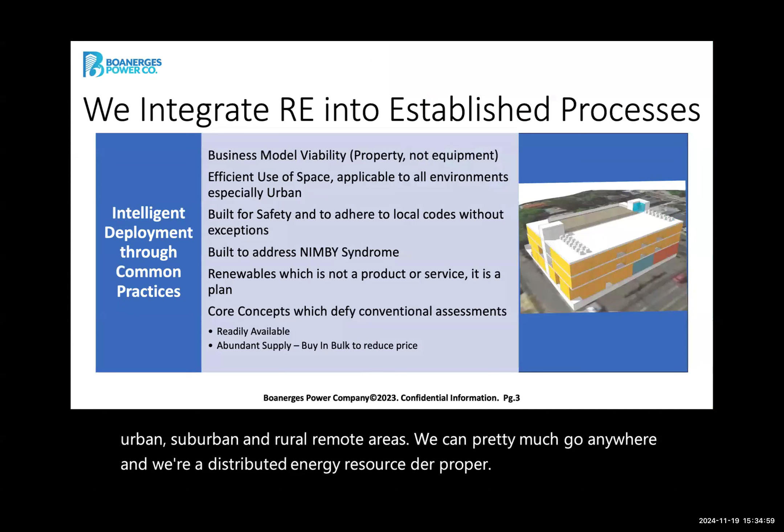Let me see something, see if I can change my setting here. Can you guys still see my screen without my notes? Well, we see right now, Terrence, a very small version of the presentation, another one off to the right, and then your slides across the bottom. Okay, I can't do that then. All right, I'll just have to wing it. Let's see if I can do it again.

What we do is integrate into established processes. We found that when we first started, we were always looking at some sort of exception or variance, especially for height. As I did my research, I found that one of the best ways to build a business is to build it so that it already follows the rules instead of attempting to make new rules for myself or get exceptions.

We use space efficiently. We can be applied to all environments. We are built for safety.

We adhere to local codes, especially gas codes or spatial codes between electrical equipment and water. We're built to address the NIMBY syndrome, not in my backyard, because we've seen several projects go awry and get canceled because of not in my backyard syndrome. It became a big problem early on.

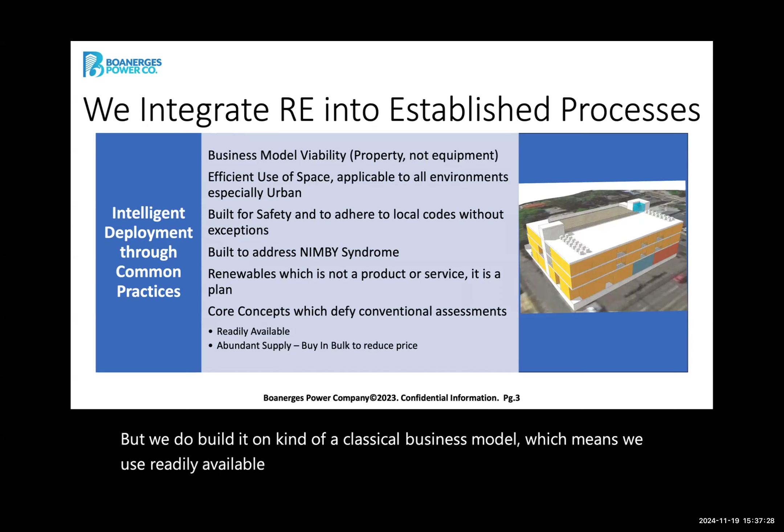So our core concepts kind of defy conventional assessments, but we do build it on a classical business model, which means we use readily available resources and they have to be abundant in supply so that we can get them cheaply. So those are our foundations.

We try to raise the standard of renewable energy and try to erase the stigma that it's only for the daytime and you can't use it at night. So we were already into applying multiple sources of renewable together.

We found that most people were like, can you do solar? Yes. Or can you do wind? Yes. And now finally they're saying, let's do a combination of solar plus wind. Well, years ago, we were already doing combinations of solar plus wind, plus battery, plus natural gas.

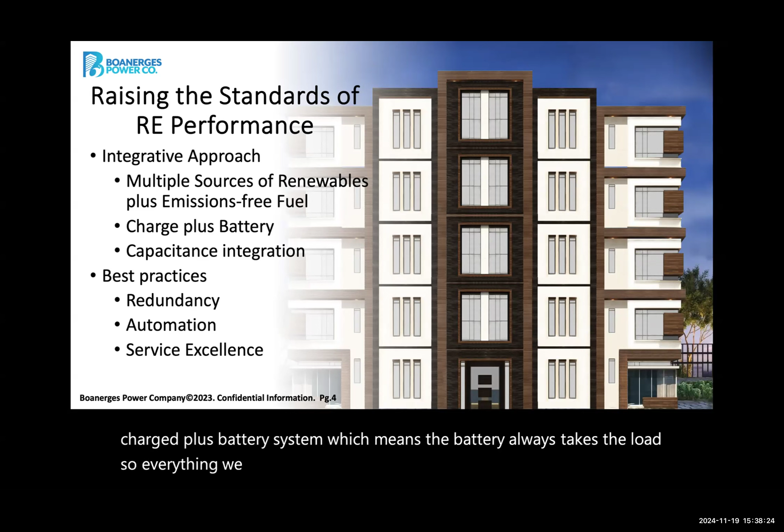We're always plussing, as well as we're a charge plus battery system, which means the battery always takes the load. So everything we do, the battery's doing the work, not the solar or the wind or any kind of input. And that's our first efficiency.

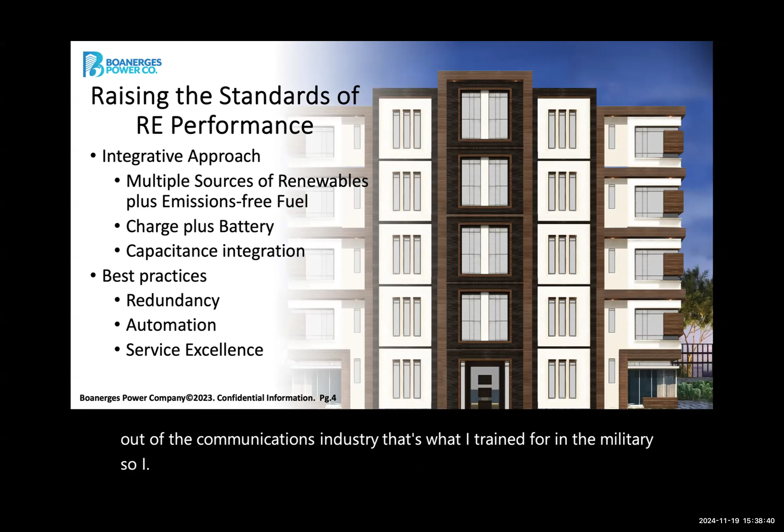I came out of the communications industry. That's what I trained for in the military. I spent about 30 years in satellite, fiber, and television automation. So I'm very familiar with user interfaces, building automation, and building machine control systems. That's what I did for 30 years, and I kept doing that through these processes.

The pictures you're going to see are just indications of what we're about to do. They're just setups, they don't apply to the information I'm going to give you here.

So we build a multi-powered load balancer. It's a platform, a structure, a building, which incorporates solar, wind, hydrogen, hydro, and batteries. It's a pump storage system, modified small pump storage systems.

It works 24 hours a day, 7 days a week. We've worked it with both propane or natural gas, and also we can work it with hydrogen fuel cell setups. We try to fit in where we can fit in, especially in our earlier days, and that was mostly propane for remote uses way out in the middle of nowhere.

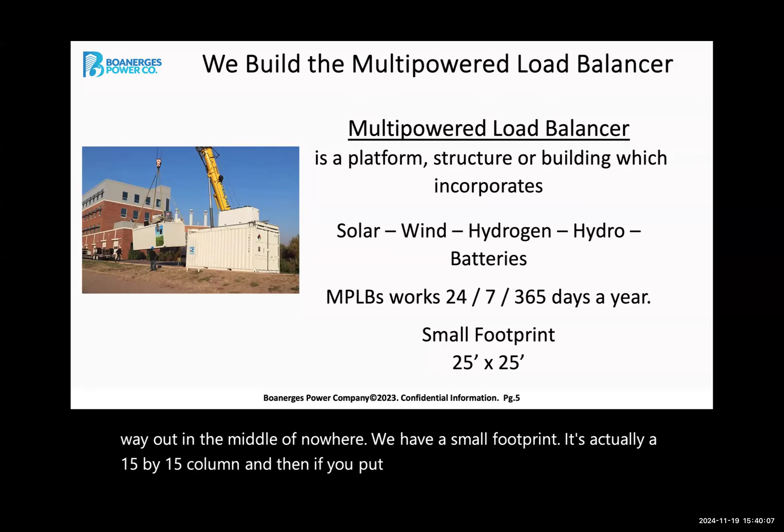We have a small footprint. It's actually a 15 by 15 column. And then if you put it inside its own building, it's a 25 feet by 25 feet column finished construction.

Our basic principle is when the sun shines, we charge the pump battery. When the wind blows, we charge the pump battery. And when the sun doesn't shine and wind doesn't blow, we use fuel to charge the pump battery, for 24 hours of operations. And if we're using hydrogen, it's 100% emissions free.

Right now, our big project that we're pushing for, and the reason why we were at Hydrogen Day, is that we've developed a green hydrogen of sorts, or a hydrogen fuel station that is a distributed hydrogen production. So instead of a central production where it's a hub and spoke, we developed something different.

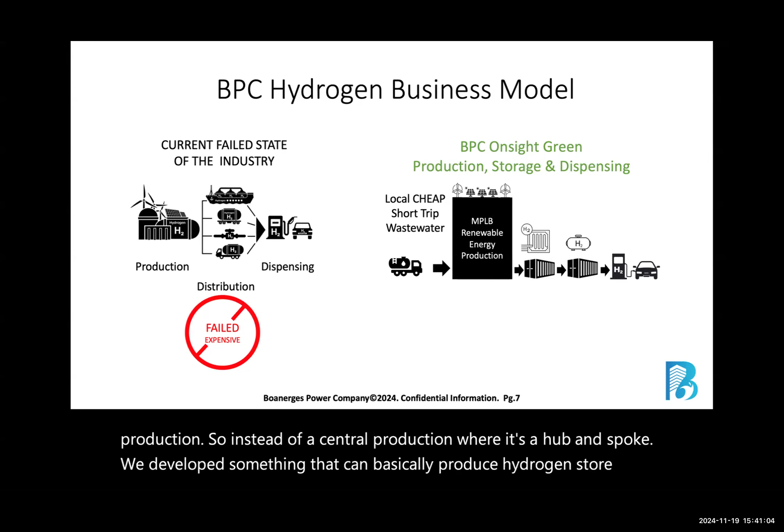It can basically produce hydrogen, store it, and dispense it all in one spot. Our input is, of course, natural gas or hydrogen, and also wastewater. So we built it on wastewater.

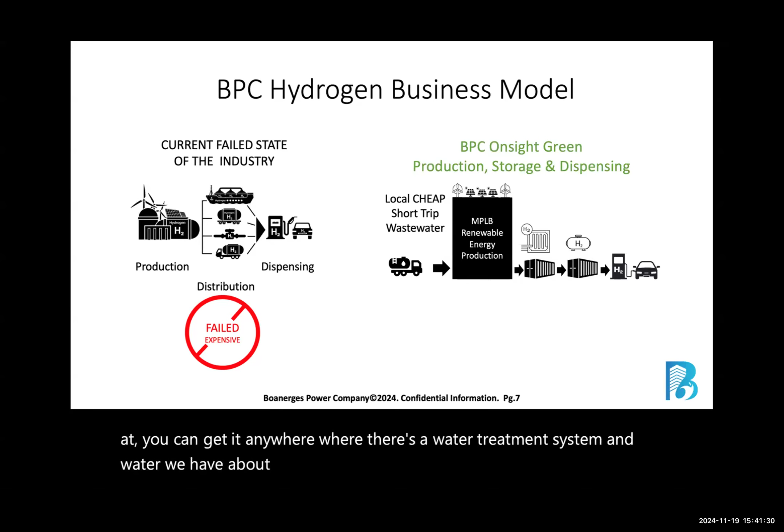Wastewater in the United States is extremely available. You can get it anywhere where there's a water treatment system. And we have about 16,500 water treatment systems across the United States of America.

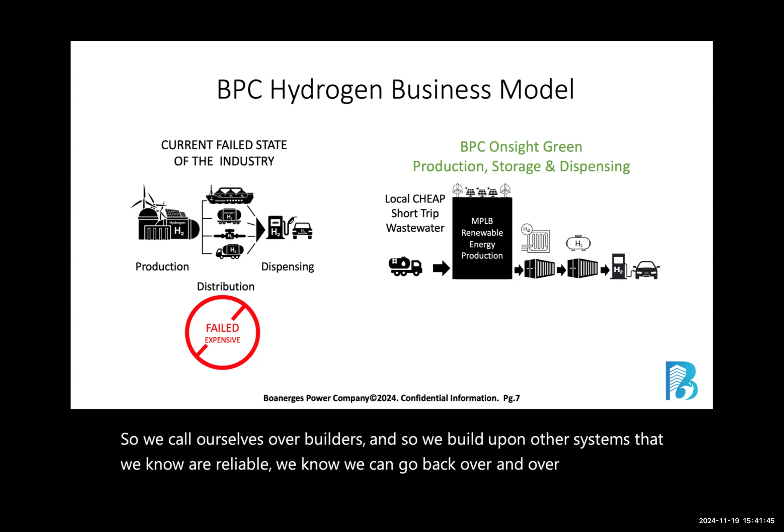So we call ourselves overbuilders, and we build upon other systems that we know are reliable. We know we can go back over and over again, systems that are extremely cheap, and that will not fail us easily.

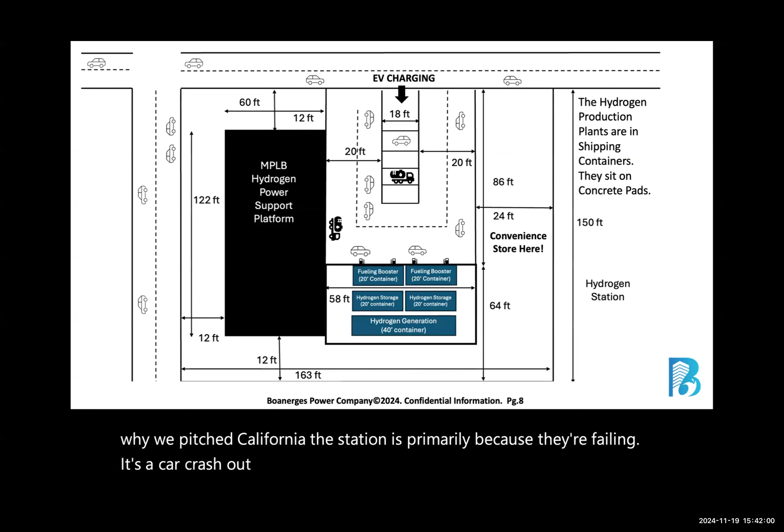And the reason why we pitched California, the station, is primarily because they're failing. It's a car crash out there. The oil and gas companies are really failing to serve fuel cell electric vehicles across the state.

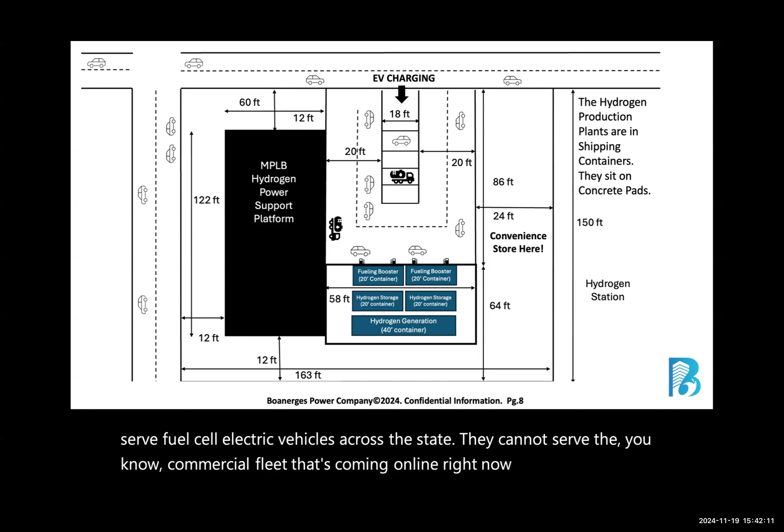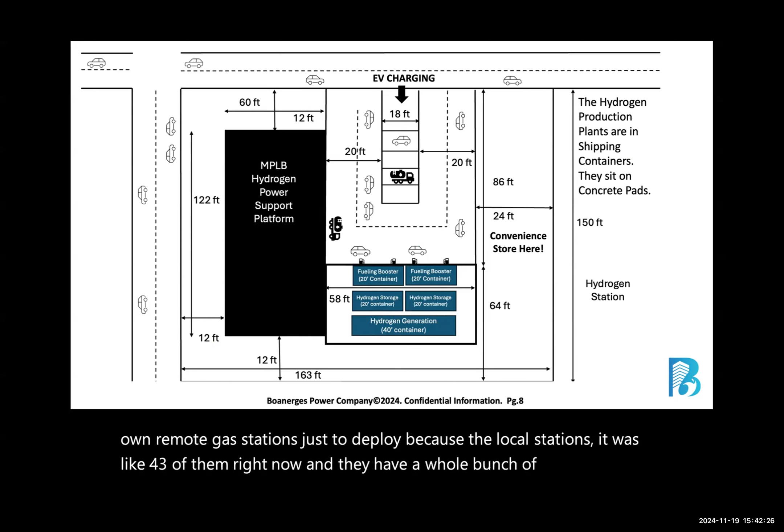They cannot serve the commercial fleet that's coming online right now. So even the commercial fleet is having to develop their own remote gas stations just to deploy, because the local stations—there's like 43 of them right now, and a whole bunch are in operation, or basically in planning or construction. They're just not doing the job. They run out of gas a lot.

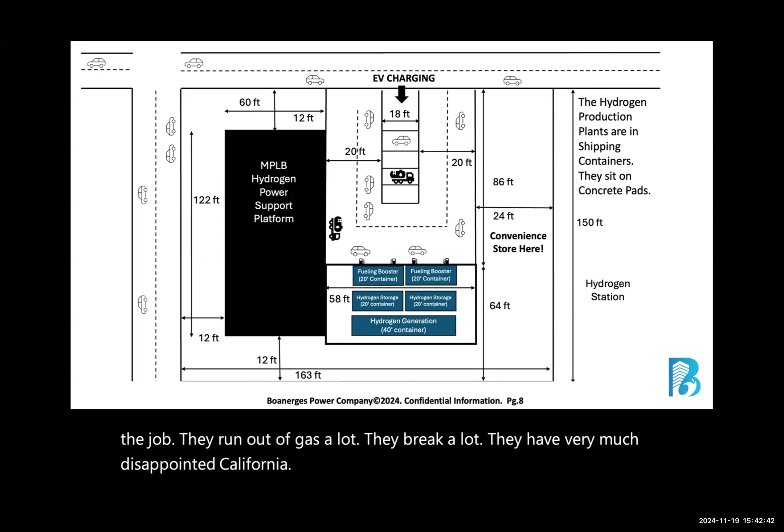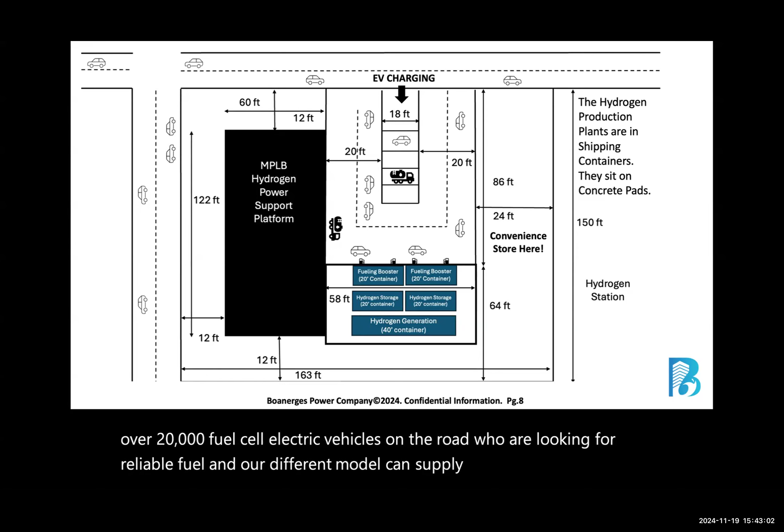They break a lot. They have very much disappointed California fuel cell electric vehicle owners. So we figure it's an opportunity for us to come in and stake a claim in that market, and actually have a market of over 20,000 fuel cell electric vehicles on the road who are looking for reliable fuel. Our different model can supply that reliable fuel through redundancy and excellent service.

So just to give you an idea of what we've done in the past, who we are, and how we do things, I'm going to show you some of our various quotes for some of the people we've attempted to work with. RTD had some land at I-25 and 225.

It used to be land that they were going to put a train line in to Aurora down that line, and they decided not to, and started to sell it off about 3 or 4 years ago. So we pitched them a development for disabled people, right across the freeway, right down the street from the RTD station, with very flat plains where they could easily roll down.

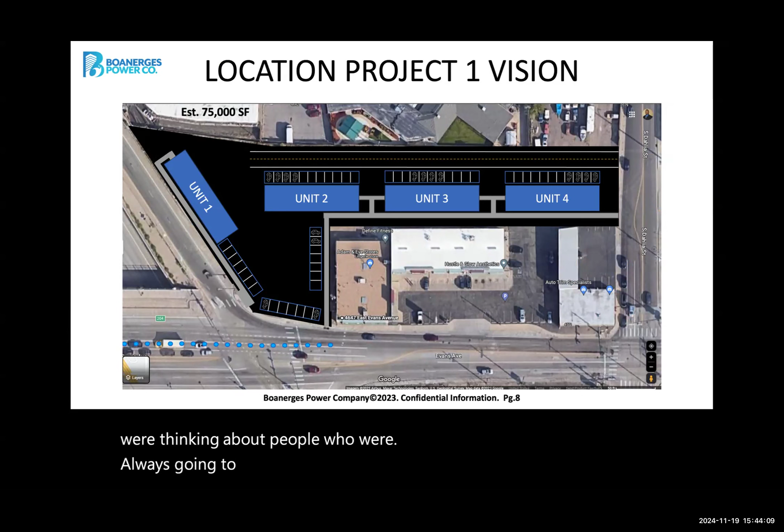So we were thinking about people who were always going to be taking RTD or some sort of public transportation instead of driving themselves, having a place where they can have families and easy access to an RTD station. An RTD station is to your left and across the freeway.

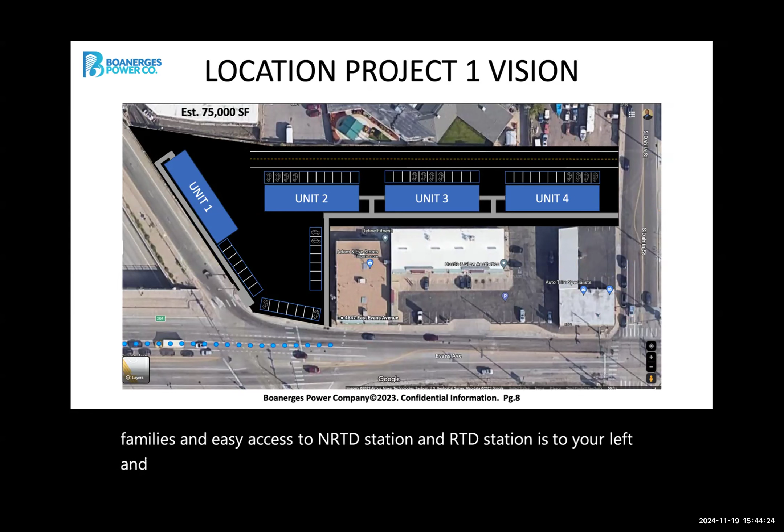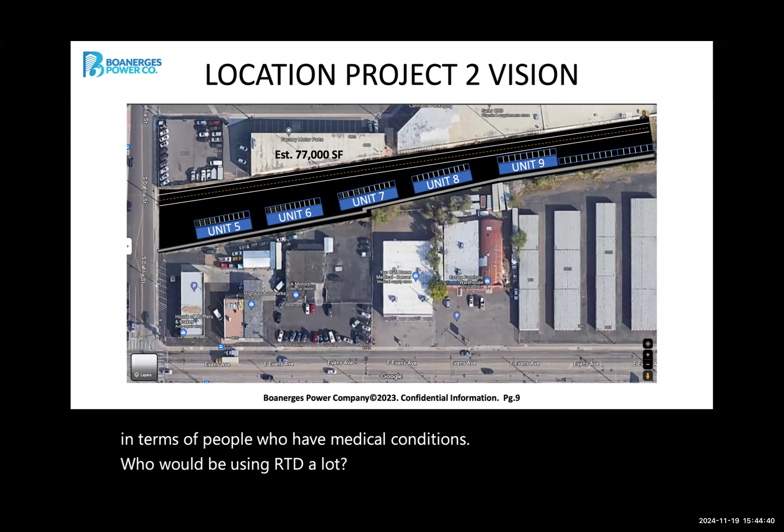So we were going to put some homes there, and these platforms are backup power for these homes. We're thinking in terms of people who have medical conditions, who would be using RTD a lot, and they would need housing that catered to that. So that was one of the ideas we pitched about a year and a half ago.

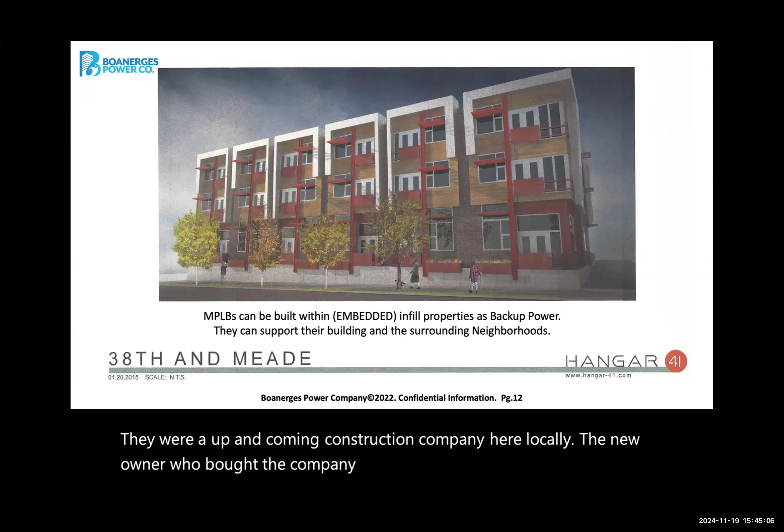38th and Meade takes us back a little further, to '22. We had a partnership with our friends at Compass Construction. They were an up-and-coming construction company here locally. The new owner who bought the company really loved green buildings, and he was trying to do a green multifamily project up off of 38th and Meade.

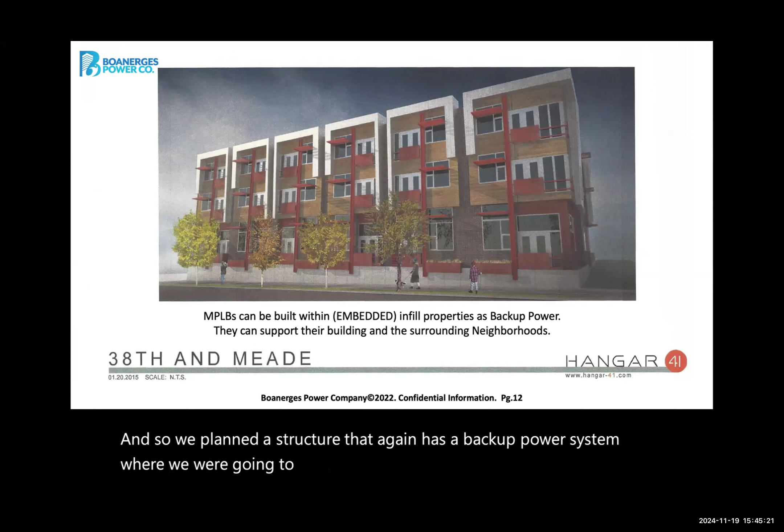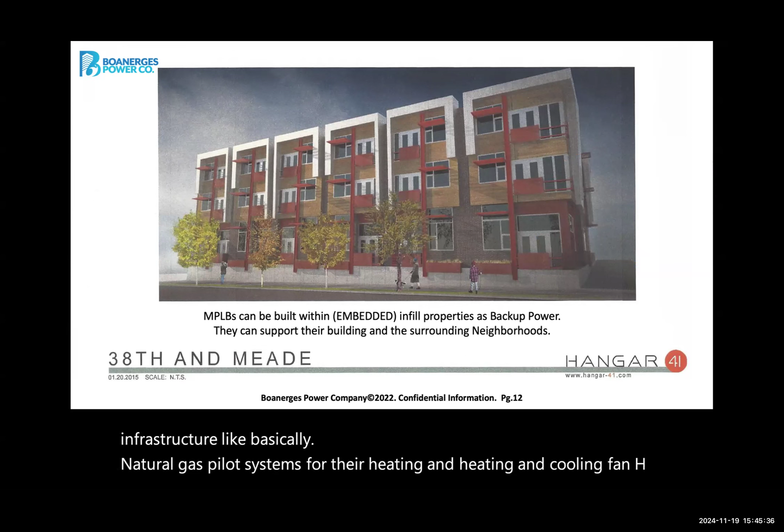So we planned a structure that again has a backup power system, where we were going to support what we call critical family infrastructure—basically natural gas pilot systems for their heating and cooling, HVAC fan, and things like that. That stuff would stay on, and they'd have what's called green plugs—one or two plugs in each household—that would stay on during power outages.

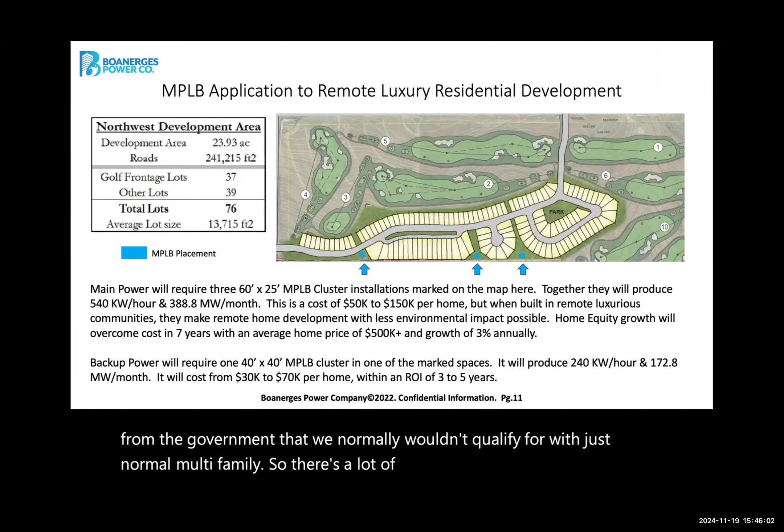So we use renewable energy as a way to garner resources from the government that we normally wouldn't qualify for with just a normal multifamily project. There's a lot of resources with all the different bills that have come out—IRA 2022 and others—where renewable energy can really help you build, getting a 20-30% return for projects. So that's what the idea was: add renewable energy to a housing project and help with the funding of it.

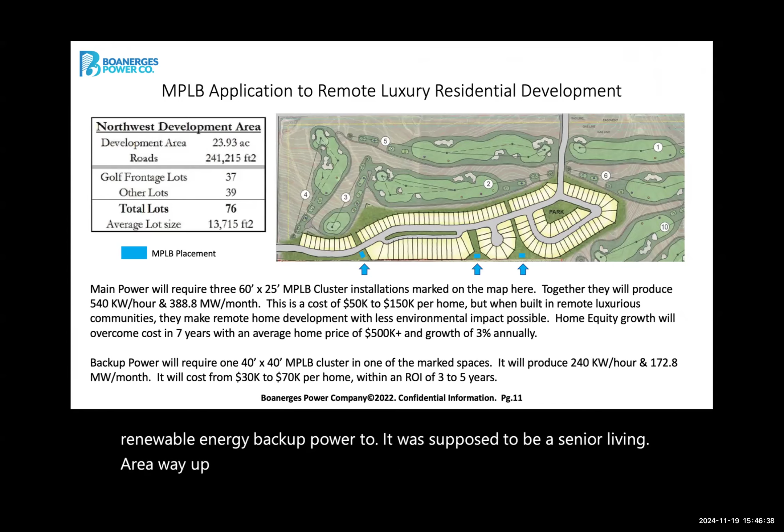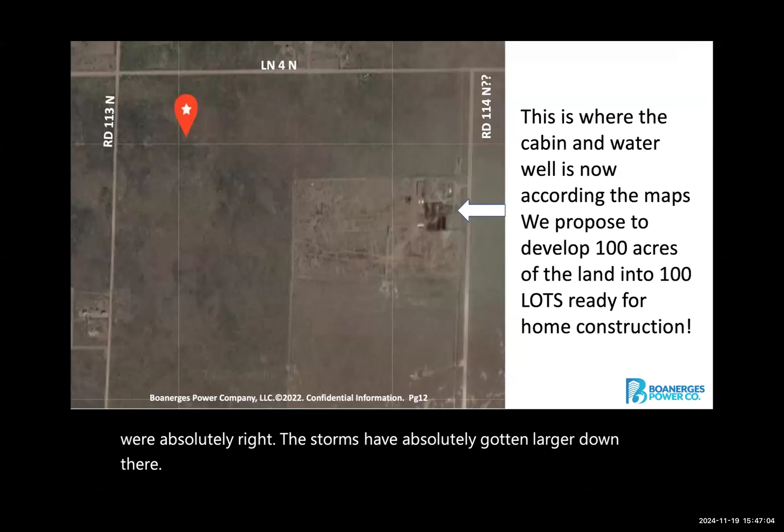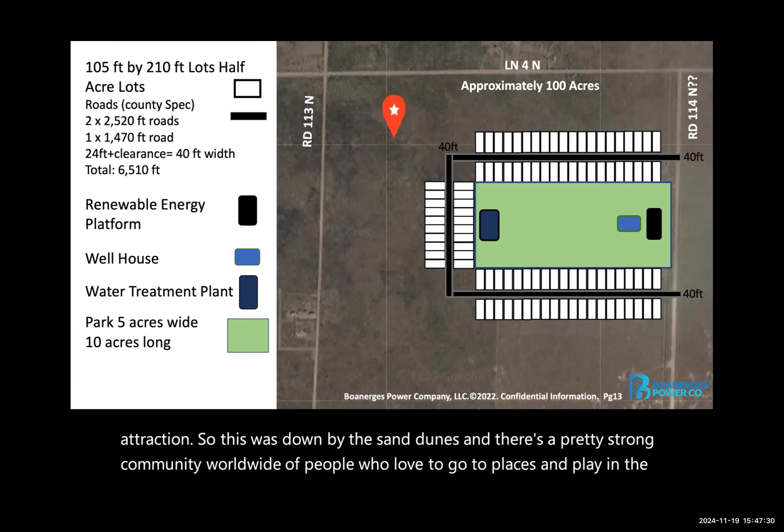Alamosa is a green lots project—one of our touchstones where we put a green lot out for sale near a place of attraction. This was down by the sand dunes, and there's a pretty strong worldwide community of people who love to go to places and play in the sand—dune buggies, races, dirt biking, a huge community. And Alamosa, if you've never been to the area, is surrounded by mountains, so it's beautiful.

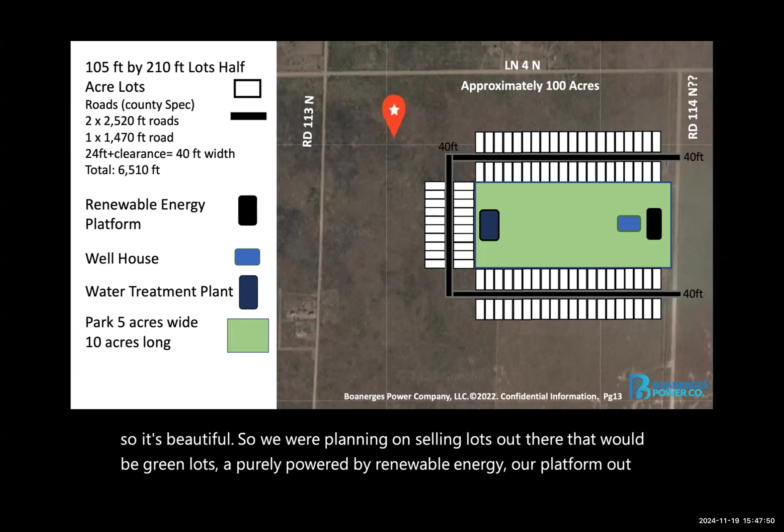So we were planning on selling lots out there that would be green lots, purely powered by renewable energy, wired to the different lots so they could build on the lot, or use it as a camper, an annual thing, a drop, a small home or trailer. It'd be completely powered by our platforms.

So that's kind of who we are. We attempt to put renewable energy to work in places where people normally believe it cannot work because of space, cost, and all these different things. And we build business models to make them work.

Our return on investment for our hydrogen station is 5 to 7 years. And if we were able to really get that big payout - I'm not sure if it's likely anymore with Trump elected, but it's still possible he might continue those programs - we'd be able to get something like $4 million back on a $15 million project using the IRA 2022. I can show you the different programs they're talking about. It's quite a bit of money, and it makes various projects where we're using expensive renewable energy viable because we can maintain it over the long term.

That's Boanerges Power Company.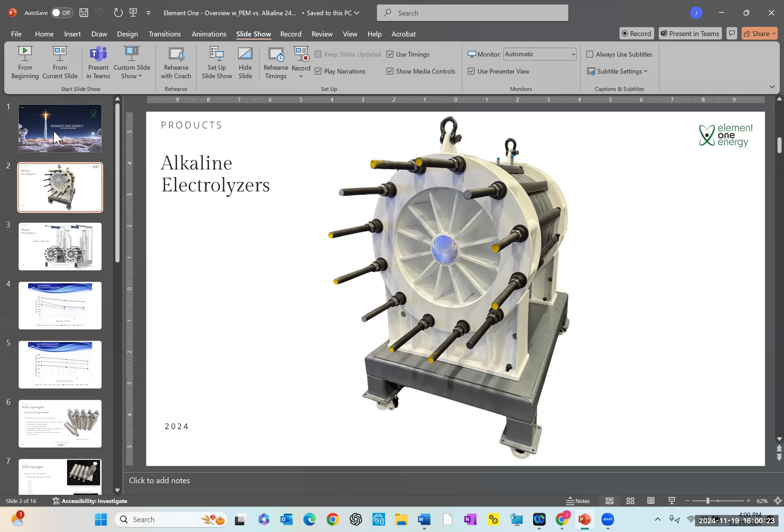We're negotiating some other European area projects, but our vision is really to be a very proactive member of the Colorado hydrogen community. We were opportunistic early on in receiving some of these purchase orders for non-Colorado projects, but our focus needs to be, and we want it to be, Colorado. We will probably never catch up to California, but California has had a lot of issues, particularly with their hydrogen refueling stations. We want to change that - we want to be focused here in Colorado.

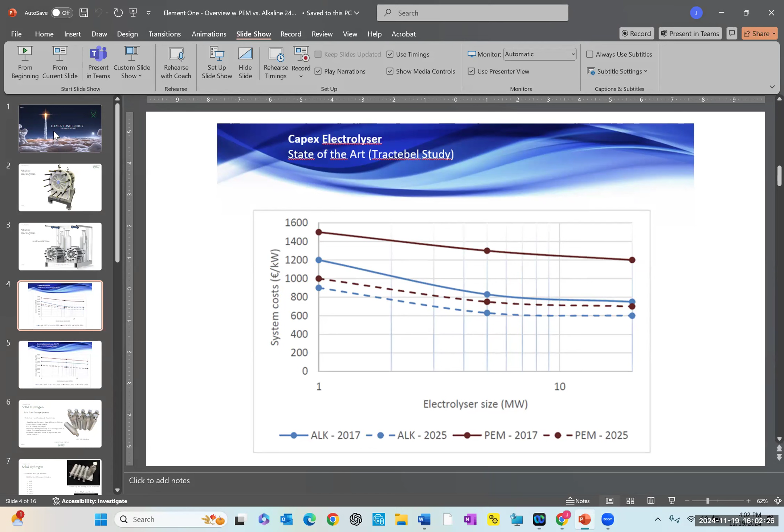Many of you know the difference between alkaline and PEM technology - both are electrolysis. These slides are tough to see from a distance, but the main point is that alkaline is materially less expensive in CapEx than PEM technology. This study came out of Europe - the Tractebel study, from late 2023 - and you'll see that by 2025 that gap will be substantially narrowed. So even though we are manufacturing alkaline, we are anxious to also deploy PEM when that makes more sense, and we're negotiating with a major PEM manufacturer at this point.

Stack replacement costs show pretty much the same picture. There is a significant gap between alkaline and proton exchange membrane, but that gap will narrow to nearly parity.

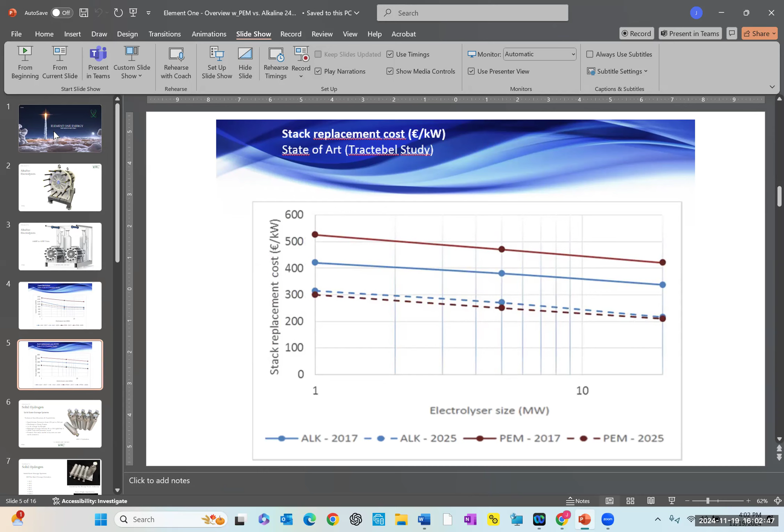In addition to alkaline electrolyzer technology, we are a strong proponent of solid state hydrogen using metal hydrides. We are one of the few in the country. There are a lot of differences between metal hydride and batteries or pumped hydro for various storage. The advantages of metal hydride are very low pressure - we can charge and discharge at room temperature, and there's very high density. Our engineering and scientific team is working daily on blending the various forms of the metal hydride. For those not familiar, it has the consistency of fine sand.

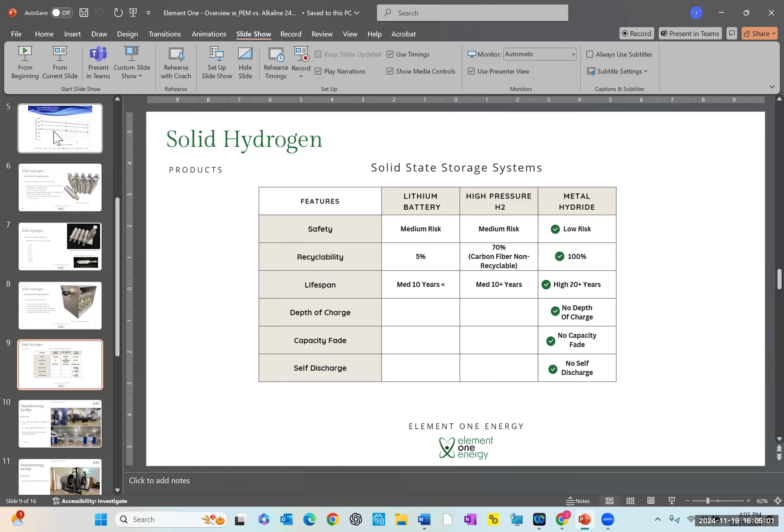What differentiates our company is complete design, engineering, manufacturing, and fabrication in-house at our facility in Colorado Springs. There are two adjacent 17,000 square foot facilities. We have multiple large capacity CNC machines, and a clean room, shown in the bottom slide - it's not used at the moment as a clean room, but it is set up for that kind of activity.

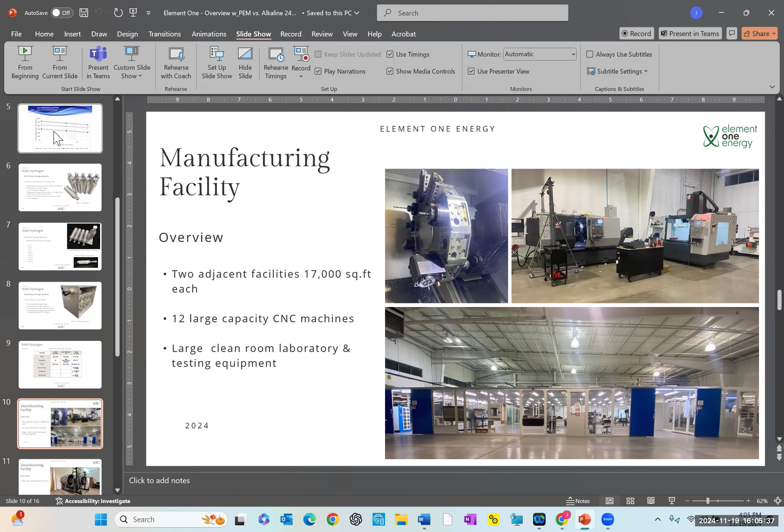We have two very large hydrothermal reactors, which are used to generate our own catalyst. You'll see in terms of comparable size, see the door in the background - that's not a trick photograph, it's a very large piece of equipment.

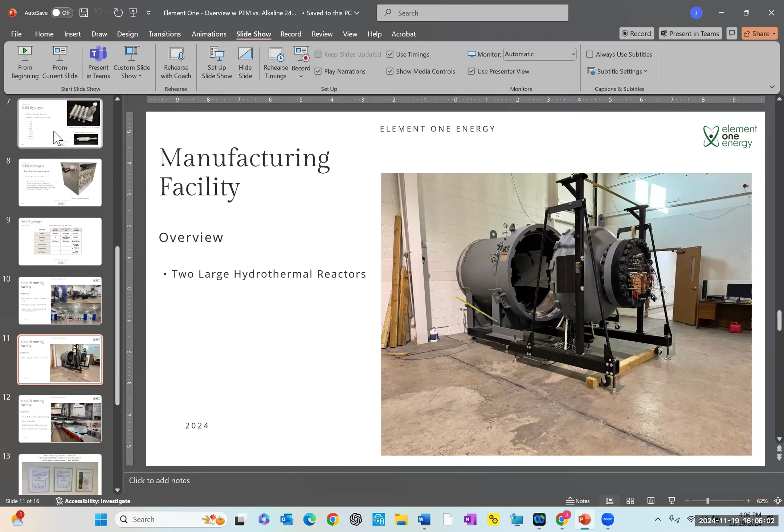Again, pictures of bipolar plate manufacturing, laser, structural fabrication and welding - it's all really in shop. We have about 15 engineers and about 25 people working on the shop floors of the two co-located facilities.

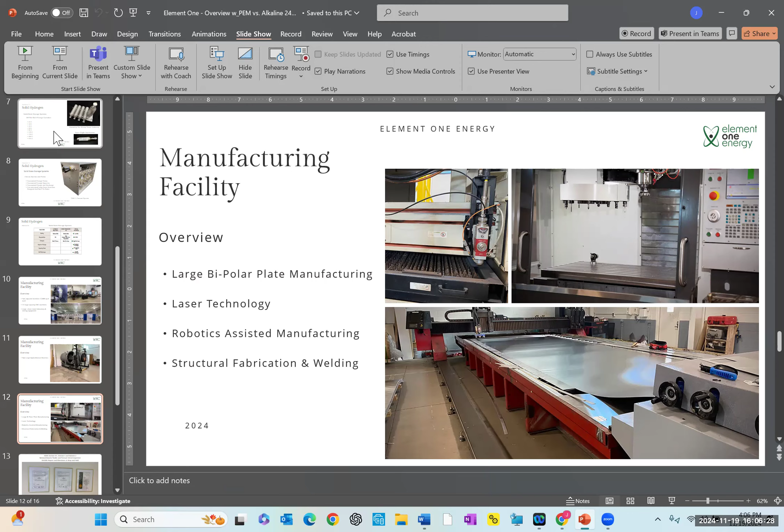We've had a lot of experience in engineering services for the above ground cryogenic storage. So we're experienced in both gaseous, liquid, solid state, all forms of storage, which of course will continue to be critically important as we move more into the mobility market.

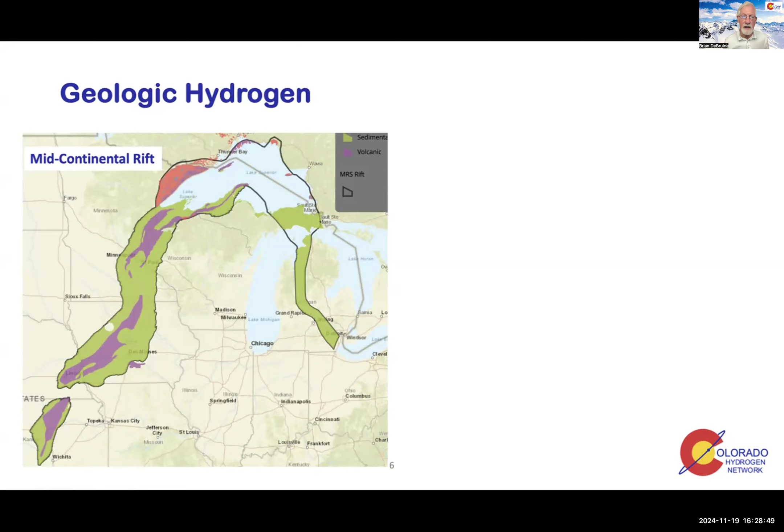So some of you have probably been seeing some of the news stories about geologic hydrogen, specifically natural hydrogen. This is a map of this so-called mid-continental rift. If you look at the bottom left corner of this picture, you can see it really covers Kansas - state lines are a little hard to see here. You'll recall that several years ago I visited a well that was actually in Nebraska, I'll talk about that in a second.

But there was just a story a couple days ago on Bloomberg - they said hydrogen wildcatters are betting big on Kansas to strike it rich. So apparently there's about 50 hydrogen prospectors out there trying to see what kind of yield or depth this mid-continental rift's going to have. Some of these may need development - they may need to be either fractured to free the hydrogen, or there may be some water injection which causes the hydrogen to be generated. But it's an interesting thing to follow.

Koloma, that company - who I should get on the meeting here, or maybe do a podcast with them - has raised over $300 million. So there's a lot of believers out there in this. Fortescue, they've got a presence now.

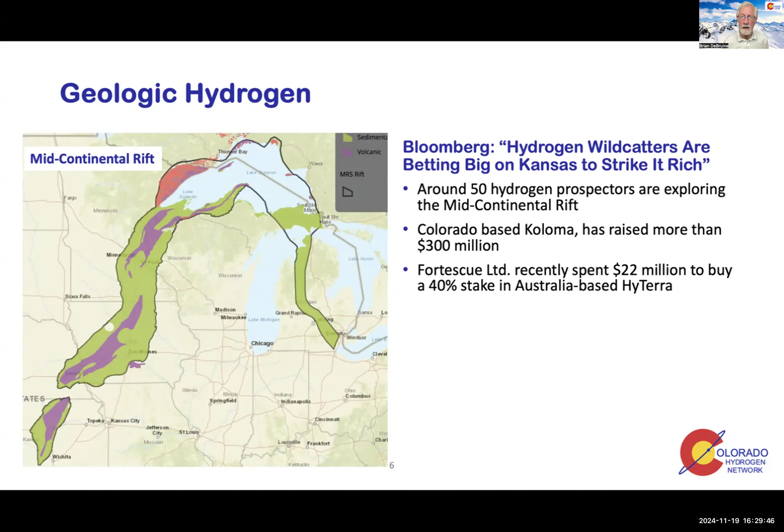Their hydrogen center that's going in near NREL in Golden. They recently spent $22 million to buy a 40% stake in HyTerra.

This is what I was referring to earlier: Viacheslav Zgonnik, who actually stepped down as CEO of his Denver-based natural hydrogen energy company, has that well out in Nebraska. I visited it. They're not saying what the output is right now, but they've said it's 11,000 feet deep. You can go to that podcast if you want to hear the interview. The plan with that hydrogen is to make green ammonia out of it, because being in Nebraska, there's a lot of demand for ammonia as fertilizer there.

And then, of course, Jeff Ellis, who's a geologist with U.S. Geological Survey as well as a professor at School of Mines, is cited all the time as being at the forefront of this geologic hydrogen work. I did a podcast with him on February 9th of 2024.

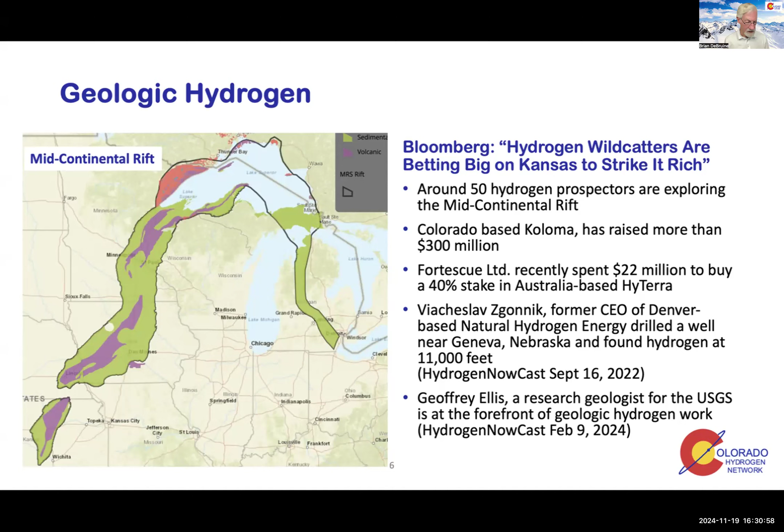So definitely something to watch. Again, it takes moving of the hydrogen, which may or may not be expensive. I don't know, Jim Corboy, maybe you can sell some hydride cylinders to help move that along. We'll have to see. Yeah, yeah.

The other form of geologic hydrogen, if I can get you to think about it that way, is using old petroleum wells. We've gone over this many times, and you've probably all seen this graphic here, but there are two ways to do that. You can use the process that Proton Technologies out of Calgary has, to inject oxygen into the well. Hydrogen is formed, and then you bring pure hydrogen out. They claim 4 nines of purity through a palladium filter.

The other is a biological method where you put microbes, bugs, down into the oil, and they munch on the oil and release hydrogen. I met the lady who's a technical officer with a company called Gold Hydrogen at the Rocky Mountain Retreat that SARAD had up in Boulder at the end of September, and we're working on a podcast. Hopefully we'll have a podcast about the biological extraction of hydrogen from wells.

But you can see Colorado is really sitting on a gold mine. All these blue dots are abandoned wells that are a liability on somebody's spreadsheet, and a lot of these need to be remediated so they don't leak. So you can imagine if we could convert these things to making pure, clean hydrogen, what a resource that would be, as well as the fact that these are spread pretty broadly around the state. Not so much in the mountains, but we're not going to have factories up in the mountains.

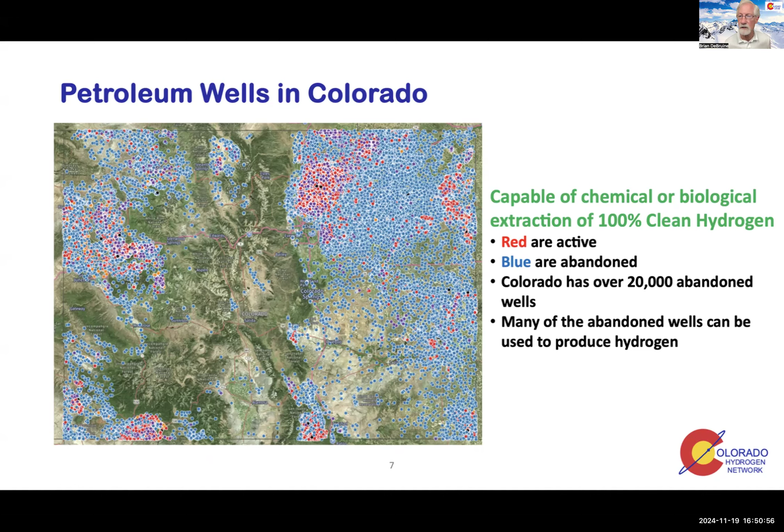So, all right, enough said. So I did want to talk just a little bit about thinking ahead to Hydrogen Day in 2025. And we had a really successful event, except for the fact that I was a little disappointed we weren't just mobbed with people. I was hoping to get a lot more people there, but with the public, I think we need to do more advertising next year.

Maybe we can come up with some corporate sponsorship that'll help to fund that. Had a little bit of luck with some of the TV stations - Channel 7 did a feature for us, which was kind of nice, but want to work that a little bit more next year. See if maybe we could do a billboard or some kind of ad in maybe the Denver Business Journal or something like that. We made a pretty good stab at social media, and thanks to Brendan Donor for helping set up Google Ads. We had a lot of activity on that, and I think that brought a few people in.

But if any of you, I know this is about a year away, but if you have points of contact within any of these things that could help open the door - the Colorado Hydrogen Network is a nonprofit, so trying to play that card maybe with some of these folks to get some reduced cost on some advertising, that would be good. We'll try to do a little bit better job of getting on some calendars and some mailing lists. I don't think we had anything in particular on CCIA, but Colorado Renewable Energy Society, CRES, I did reach out to them - they hadn't responded. But maybe try to develop some relationships with the environmental groups like Sierra Club or Protect Our Winters, POW, some of those, to try to get them to leverage their group of stakeholders to show up for something like this.